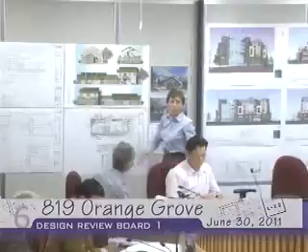I have one question. Are these vents, or do they look like shutters, what are these? Vent openings. How large are those vents? They are like 14 by 24 inches each side. Yes, there is an existing house, we are trying to keep the same elements in the new too.

My other question is, it doesn't appear there's any access to these decks you have planting on. They're all windows, there's no way to get to them or to plant them. There is no access over there, there is just planting. Okay, I think that's the only question I have.

How much of the roof is being changed on the existing? In the existing one, changing about 40%. So the whole back portion, little in front, little in the back. The whole back portion, right? Yeah, that part's all gone then. Are you creating one larger roof to cover all of that?

So this is getting eliminated too? So it's new, that one actually stays, one side stays, one side is going. So this whole side's gone, and this is all gone, so you're just going to extend this out? Actually, over there is also non-conforming. Can I come show there?

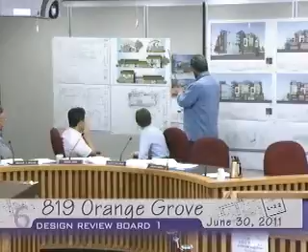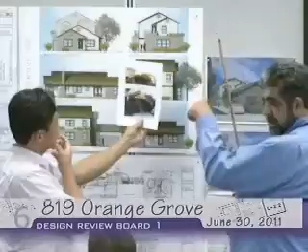Actually, on this portion, there's another roof built up, a California roof. The other way, if you see the existing one, this one looks like it was done later because of the chimney, it's non-conforming now. Chimney height should be at least 2 feet higher than the roof at the steepest point in between. So it's not the case where the chimney portion fell down or anything, did they actually roof it under? No, this one, if you see on the top, there's also the spark arrestor on top. That one is existing.

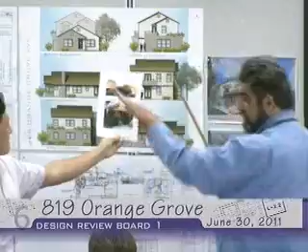We are just going to take out this portion and leave the rafters that are original there, take out only the California portion. Oh, I see, they got the hip, right, this portion, right over here. But that's the larger portion though, that's encompassing the back portion of it, so, okay.

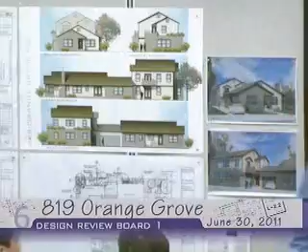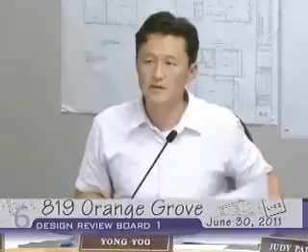On the back unit, there's a portion where you've put some planting above the roof areas that's turning that corner, creating sort of a parapet. Can you talk a little bit more about that and what you intend to do with the materials? Can I show it there? No, you can just talk about it. Roughly what you're talking about is the west elevation, and originally, if you see on the second floor, the window, that was originally a door, going out to a balcony, that portion where it's a little wider.

When we were working with staff, with Georg and Stephanie, we decided not to have a balcony there, but to have the window, and instead have the planter. My opinion is that since it's close to the property line, and next door there's a 3-story multifamily residential unit, we decided to take out that balcony portion and leave green, like a screen, with planters. We also recessed the second floor wall from the first floor because of the setback averaging. Instead of having the roof there, we decided to have the planter, which makes the atmosphere softer and nicer.

That's the west elevation.

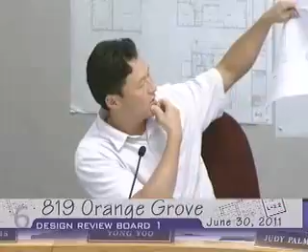Mr. Yoo? First comment, I think there might be an issue with your roof, so you need to take a look at that regarding the percentage of how much you're demoing out. I was looking at that rough sketch of your existing, and you're basically taking out that whole side of it, so your 50% threshold could kick in. Just be wary of that—I don't want you to get too far into it without having to backtrack.

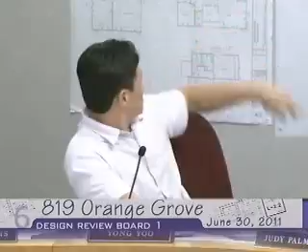I think the use of the siding is an existing material that's already there, and you're using it for the back portion of it. It's sort of a shame that the existing house is losing some of the character that's there. I'm not too crazy about the stucco front being placed in front of the siding, but it's okay. The entry to the door, proportionally, I don't know, it's not working right. You've kind of located the door and crunched it into this corner as you're walking in, and I think the entry could use a little more help in designing that portion.

Your planters on top of those parapet walls, I think you should reconsider. They're not going to be helping you that much, and it's going to create a whole other issue for the owners living there. You're going to have water intrusion coming in.

I think it looks like it came out of the idea of having a patio that maybe didn't work out, so they said let's put a planter up there. I think it'd be better if you just used a similar roof and kicked it back, keeping it clean and the same look as the rest of it. If it was an element that really helped the building, maybe in that corner it'd be a good addition to change up that back end, but I don't think it's doing that, just creating a bigger mass on the back portion. Keeping it clean with the windows for a nice proportion would work out better. It might look a little crowded in there, but it could work. It's what it's zoned for in that area, so I'd be okay with that.

Well, I agree with the comments. I do think the vents look a little large, maybe because there are so many of them - you might relook at that. The planter areas are not going to be planted because there's no access, so there won't be any plants in there and nobody's going to maintain them. That's going to look like an area that doesn't go with the building. I agree with Mr. Yoo - if there's a little roof or something on there, it would be much easier to maintain, it would stay looking nice, and it would tie in with the building more.

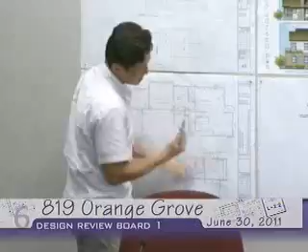Any other questions? I do - I have one question for Mr. Yoo for clarification. The comment regarding the entry - was it awkward in terms of size, location? Both - I mean, there's no real welcoming entry. The door is sort of just placed next to the wall. The proportion of this thing, and I'm sure the height of it is probably going to be in here somewhere - it's just not a nice space, and compared to what it was, it's kind of a shame.

What do you need the entry redesigned to do? I don't know how to put it into words, but it just needs to be redesigned. Would you like that to be a condition or consideration? I think it should be. Is that for the front unit or the back unit? For the front unit. The street view, I think, is what you're saying - this whole front area gives it a little shadow.

Well, not just that, but it looks basically like an apartment entry that you would go into, like a 20 unit place or something, as opposed to having sensitivity to the entry of it. Consideration's fine - just take a look at it.

And two questions for Ms. Palmer. One regarding the master bedroom that's on the second floor, correct? We're talking about the front unit? No, I'm talking about the ground floor. Are we talking about the front unit? No, I'm talking on the east side - yeah, the front unit.

Master bedroom in the front unit. All right, so reduce the size of the addition to provide a larger outdoor area. They're not going to have access to this patio, so just consider reducing that a little.

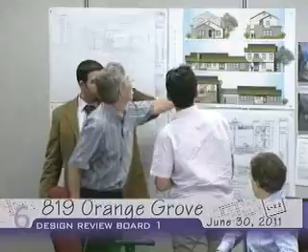Oh, right, it's hidden. I see. So it's just a freestanding eave, in fact. That's kind of weird, and I don't know how structurally they're going to hold that up.

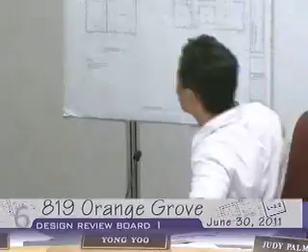Can I add a condition about the balconies? I think these all stem from this look that kind of merged into that, and then they wrapped it around in different places. Maybe reconsider looking at that, because it becomes a foreign object.

Are we talking about both north and east elevations, or just all elevations? I mean, to make it consistent throughout. Is it the railing that doesn't work? Especially on the east, I think the whole thing is too massive. It just sort of looks like it's pasted on.

So reconsider the design of the balconies, integrate them more into the building, especially if they're going to redesign the whole wrapping parapeted area.

All right, and the two other comments by staff—would you like us to put those as conditions or considerations as well? The window one, I think, has definitely got to be addressed; they need to do something with the windows. I think what we meant by that condition is, as Chair Palmer was saying, to review the windows and provide some hierarchy and composition.

We were focused on that one particular face, but if you'd like that to be a consideration around the whole building, that probably wouldn't be a bad idea. So I think that should read as: reconsider the size and location of the windows to provide some hierarchy and more thoughtful design around the building.

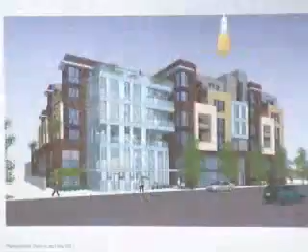We've developed these conceptual plans very quickly over approximately 6 weeks in order to meet some late-breaking funding deadlines of the city, and we appreciate the assistance we received from staff in putting these together.

Mercy Housing owns and operates 6,000 apartments in California and serves about 50,000 people nationally.

This proposal is on property that is owned by the hospital, Glendale Memorial Hospital, and next to the hospital campus. It's possible in part because we have a special relationship with the parent company of Glendale Memorial Hospital, Catholic Healthcare West. We've developed a number of developments on their campuses and on adjacent properties due to a nonprofit affiliation that we have with the hospital.

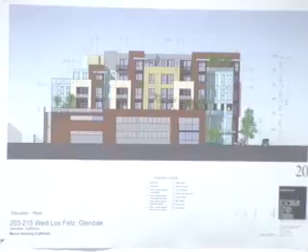We see this preliminary design as the first step in an inclusive community design process, which we typically use on all of our developments.

So we would anticipate meeting over the next couple of months with the city, the hospital, the veterans community, and the area neighbors, and we look forward to receiving feedback from you tonight so that we can return in some weeks in the future with a more fully developed plan, which we can go on to build to serve low-income families and veterans in the community.

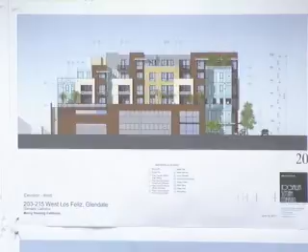At the same time, we're using colors and different materials to reinforce that. You'll notice that as you go around the building, there's really not a side per se or a rear—it's articulated throughout.

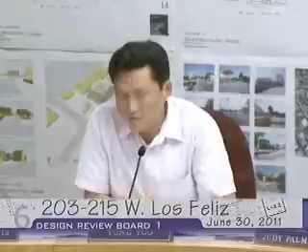I'd like to commend bringing the project in a preliminary stage. I think that really helps us get a sense for the project, because it's a large enough project that it's got its own complexities within it and the site itself. Also, Togawa Smith, you guys do a lot of housing projects and you're very good at that, so there's a certain level that's expected, and I think it's there.

I appreciate that it's developed enough that we can start the conversation and talk about it, because sometimes we get projects that are just kind of thrown together and not even worth talking about. So we appreciate that, the graphics and the standard that you brought to it.

The one thing, when I first saw it, I really like the elevations in that all four sides are interactive in what you're trying to do. In the same way, I guess it's kind of good and bad. It's good in the sense that there's complexity, there's repeating items that you can get a hold of and say, okay, I see this pattern with the verticality of this element versus that.

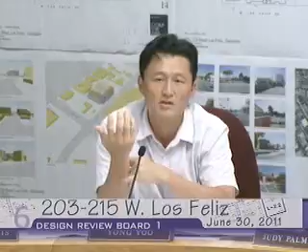But it also kind of gets lost a little bit because it becomes the same thing all the way around. So one thing I'd encourage is that, depending on what side, sun exposure, those kinds of things, you address some of those issues using different elements that would show, okay, this must be their north face because of this, that must be their southern face because of that. I think that would bring a whole other level of success to the project.

The one differentiation that's there is the commercial corner right off of Los Feliz. In that corner, it's very prominent. I could see it, it makes sense.

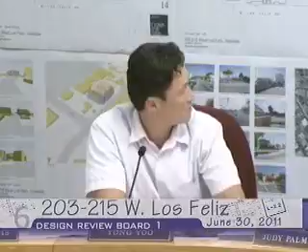Now, am I right that it's just the bottom floor that's commercial, with the rest being decks and parts of decks? Maybe bring in a little more of the materials from the other side, so language-wise it doesn't read almost like, wow, this is the commercial corner, it's all commercial, slam dunk, period. Maybe address that a little bit.

I think it makes sense. The front end is your largest face, going a little more vertically, and then it tapers down on the left and right sides, as well as in the back, doing a good job stepping down as it gets into the smaller, maybe residential areas in the back, near the gas station at the corner. It's not always going to be a gas station, so addressing that corner makes sense.

It's got a very good presence on that side, and when you're looking at that one view showing the hospital on one side and this building going in, there's a relationship mass-wise, so I understand what's going on there. Use of materials, I think it's good. You're using a lot of materials and you're very good using them, so I think you'll apply them well. That's going to make a lot of sense.

It's just so it becomes a little bit more about organizing your materials, in a sense that this is the podium, these are the things sitting on top of it, these are my vertical elements maybe. And it's just maybe the time that you spend—it sounds like you haven't had much time working on it. So I think taking it to the next level, it's very promising, and I look forward to seeing the project again.

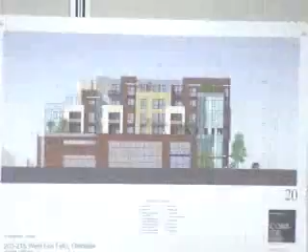One of the things we worked together on is trying to integrate the lower floors, because they're garage floors, into the upper portion. So your comment about potentially recessing those bottom floors—recessing some of the windows—that's part of the reason those vertical elements have the same material, to try to help integrate that. So the idea of recessing some of the treatments, I think those are probably grills because of the mechanical ventilation that's necessary, but also breaking down the scale of those openings is probably going to be useful to help integrate that.

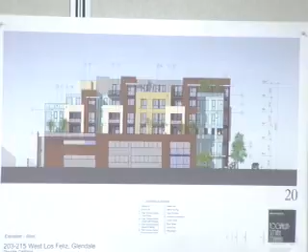And we also heard from Board Member You that even though you seem to appreciate the strong statement of that glazed corner element on the southwest corner of the building, you also seem to think that piece looked a little too commercial and should be brought more into the body of the building. Would that be a fair assessment?

That's a little bit of a struggle, because it's not a commercial corner, but there's an effort on the architect's part to recognize that because of the way Los Feliz curves, that is really truly a gateway site, and that's the piece of the building that will be extremely prominent.

So even though that's not a commercial corner, it was pulled out volumetrically. I don't have a problem with it reading as a commercial block. I guess conceptually I was thinking that the upper floors aren't really commercial, but they're glazed and dressed as a commercial space. So maybe there's a way to do both, having it read as a volume but tying it back into the residential building, maybe it's got hints of the other stuff.

Something like that. I'm not opposed to it being a glazed sort of, almost like a lighthouse kind of point in the corner, but I think it'd be okay if they maybe tied it back a little bit with the rest of the building.

Well, thank you very much for your comments. It's very helpful.

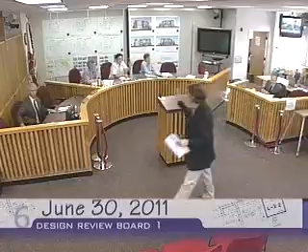I wanted to remind everyone that we have a joint meeting next week, so we'll see you two weeks in a row. How exciting is that for us? I don't know, how exciting is it? It is very exciting because we will be presenting the North Glendale Community Plan and Comprehensive Design Guidelines to you. We'll be presenting that to both boards for the first time. It will be a lot of information.

So we have provided in advance those documents. Those documents are in color, they look really good in color online. We'd like you to get familiar with the documents, but we don't expect in one week that you will have waded through them. We wanted to provide you with some summer light reading so that in our second joint meeting on July 28th, you will have lots of comments and we'll have a very vital conversation about all the things we got right and some of the things you'd like us to add to the community plan and design guidelines. It's like a summer book report.

Oh, I know, that's right. So the community that worked with us was amazing in their consistency in working with us over the last couple of years, the energy that they put into it. So we were very appreciative of their participation, their continued participation over a long period of time, and very appreciative of all they taught us about that community plan area. So we're looking forward to having a good discussion with you.